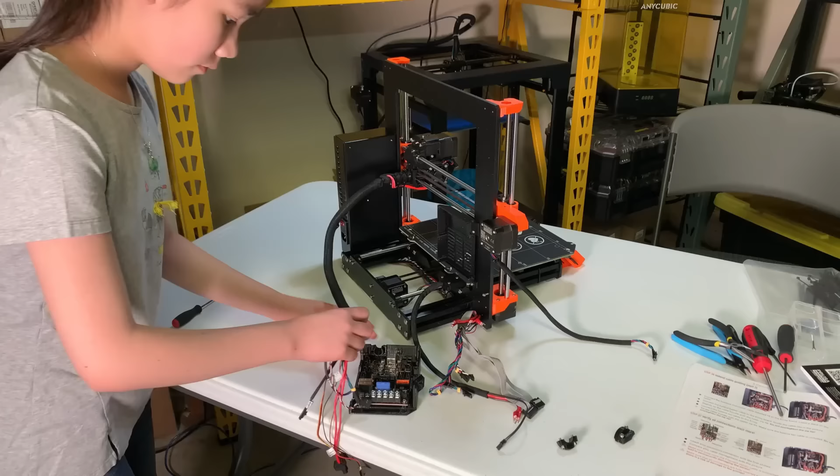Today, I'm going to review the Sovol SV01 Pro, which is an upgraded version of the SV01. It's one of the most affordable mid-range 3D printers and only costs around $300.

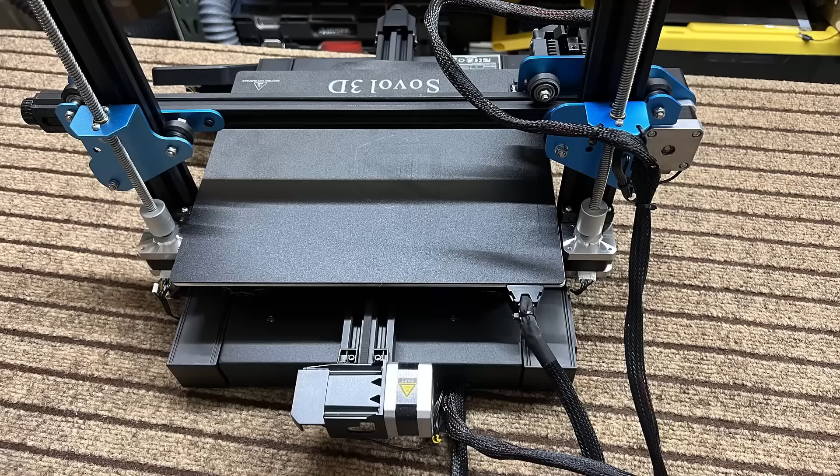It comes with almost everything you would expect from a mid-range printer, including a dual Z-axis, a direct drive extruder, auto bed leveling, a filament sensor, X and Y axis belt tensioners, a touchscreen, and a 32-bit board with silent stepper drivers on the X, Y, Z axes, and the extruder.

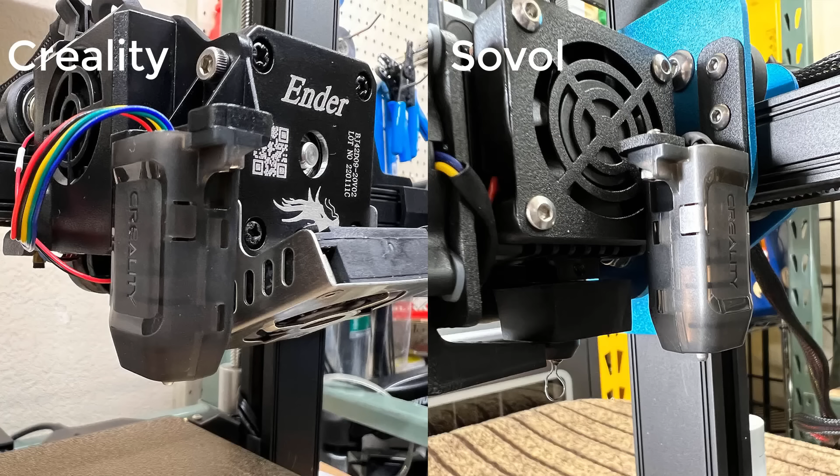One thing I noticed is that Sovol is sharing the same supply chain as Creality, so they have the exact same motherboard, filament holder, filament sensor, CR touch sensor, belt tensioners, and many other standard components.

This is basically a larger Ender 3S1 with a 280 by 240 by 300 print volume, which is around 50% larger than the Ender 3S1's 220 by 220 by 270. It has a different extruder, and it is $100 cheaper than the Ender 3S1.

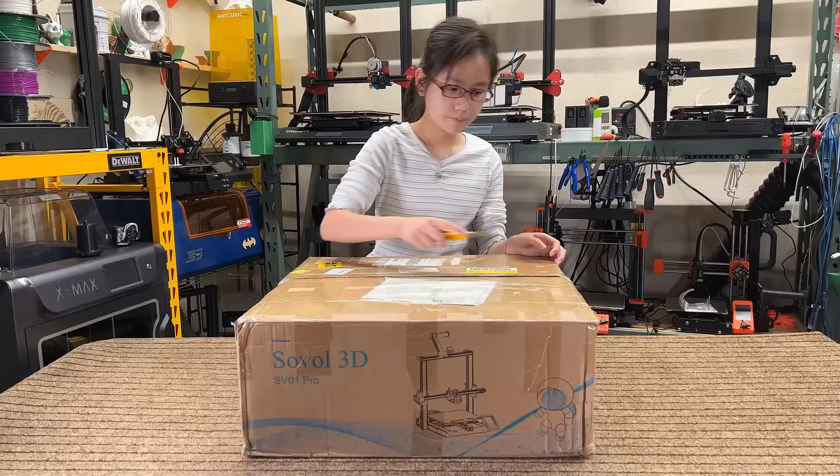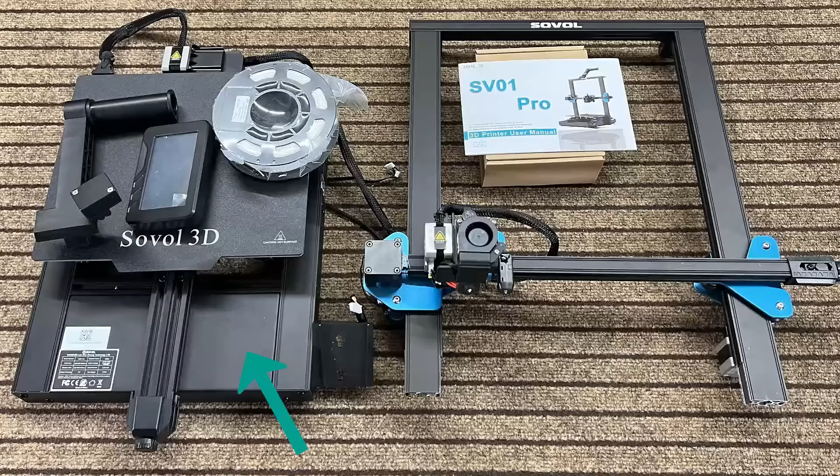We have the base, the gantry, a 4.3-inch touchscreen, the filament holder with the sensor, some sample filament, the user manual, and some tools. The assembly will be simple, and it should take less than 10 minutes.

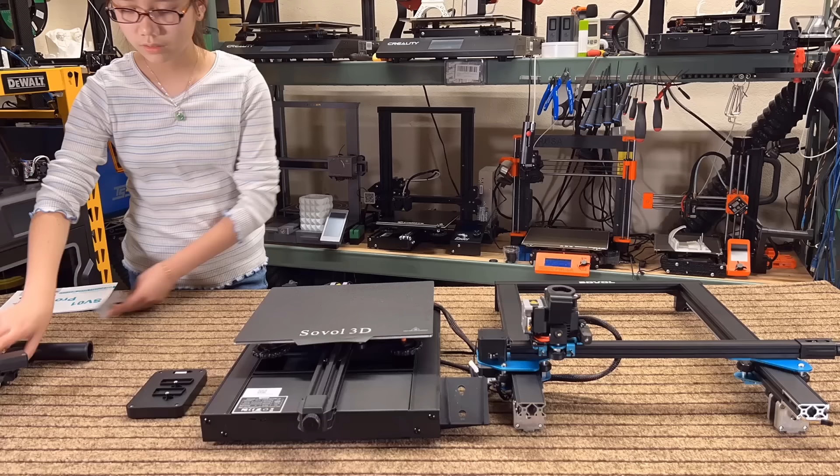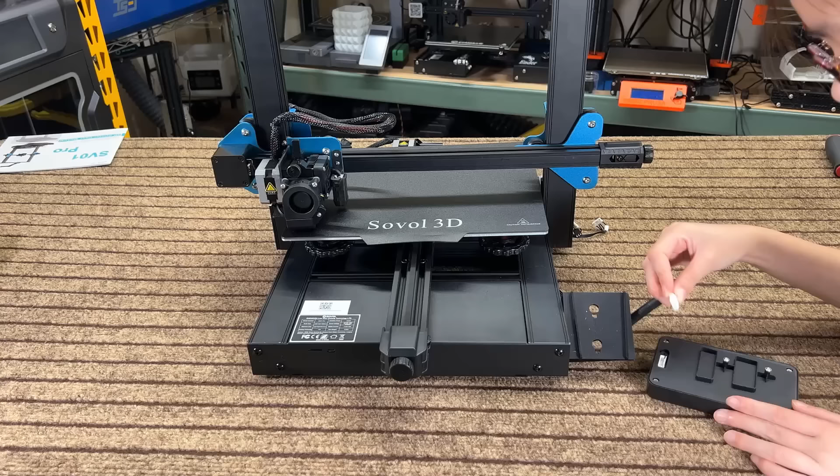First, put the gantry on the base and insert 2 long screws from the side, and I will tighten them later. Do the same to the other side and tighten the screws, then go back to the right side and tighten those screws. Connect the screen cable and snap it on the mount of the base.

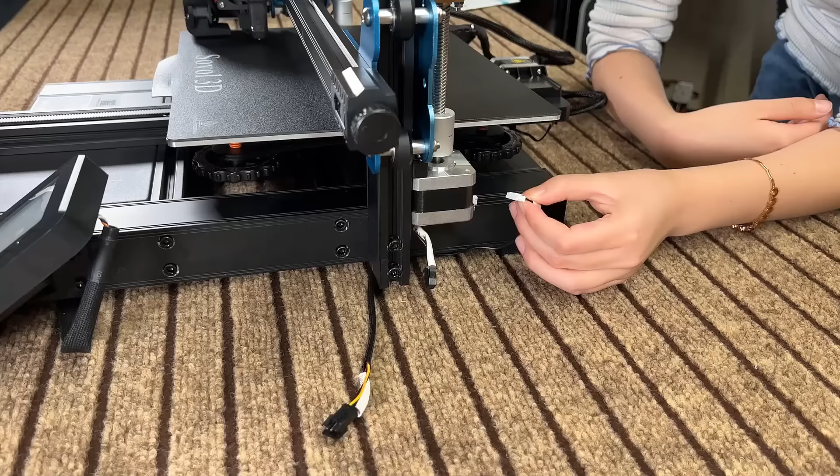The filament holder also has no screws and T-nuts, so just snap it at the top. Now, we can connect some cables, starting with the filament sensor, then the Z-stepper motor behind the screen, and the extension of the filament sensor.

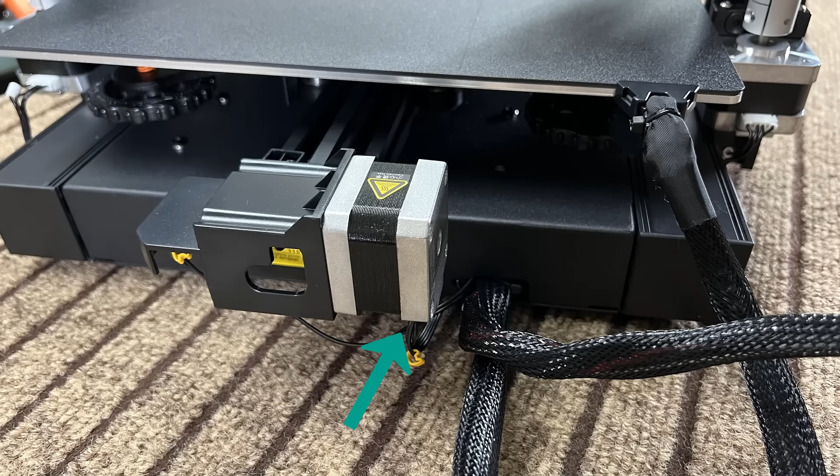On the left, we only have one Z-stepper motor cable. The rest of the cables are connected before this printer was shipped, including the X stepper, X limit switch, Y motor, Y limit switch, and the heated bed.

The last thing we need to do is check the voltage, and as I am in the US, I will flip it to 115. Okay, the assembly is done. We can connect the power and turn it on.

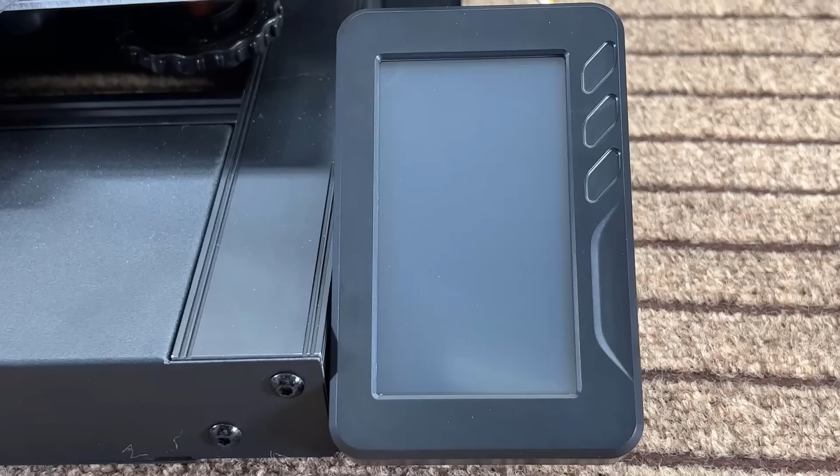The screen UI has been redesigned, and it's now simple and the menu locations are reasonable. As you can see, the Z offset, bed corner leveling, and auto bed leveling are grouped together under the leveling menu. Select the leveling menu and it will start with auto home.

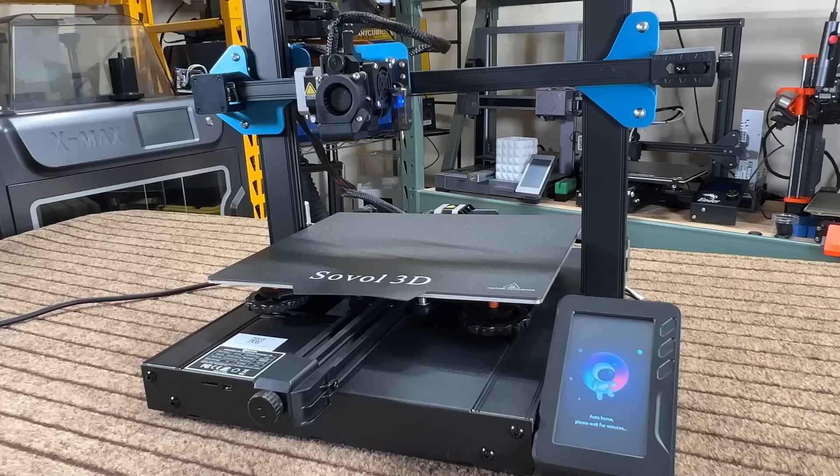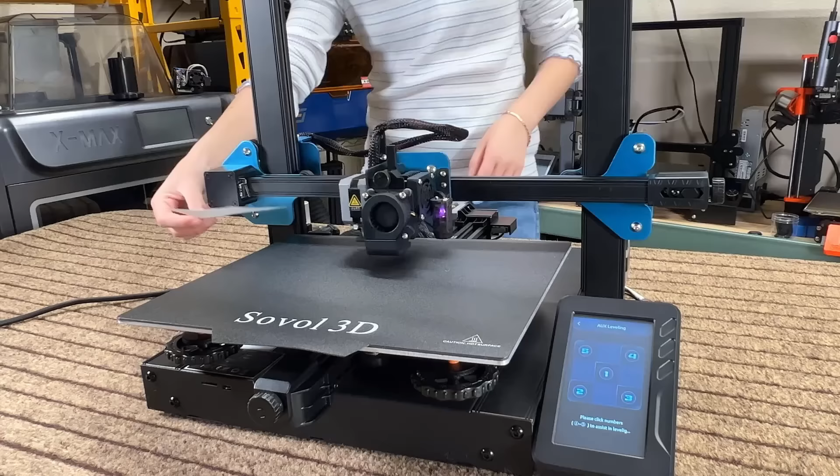Start with auxiliary leveling and level all 4 corners of the bed. Use the simple paper test to move the nozzle close to the bed and let it slightly scratch the paper. Do the same to all 4 corners, and you may need to do another 1 or 2 rounds to make sure it is perfect.

Go back and use the arrows on the screen to adjust the Z offset, and negative 1.8 mm seems perfect, so I will just save this value and start auto bed leveling.

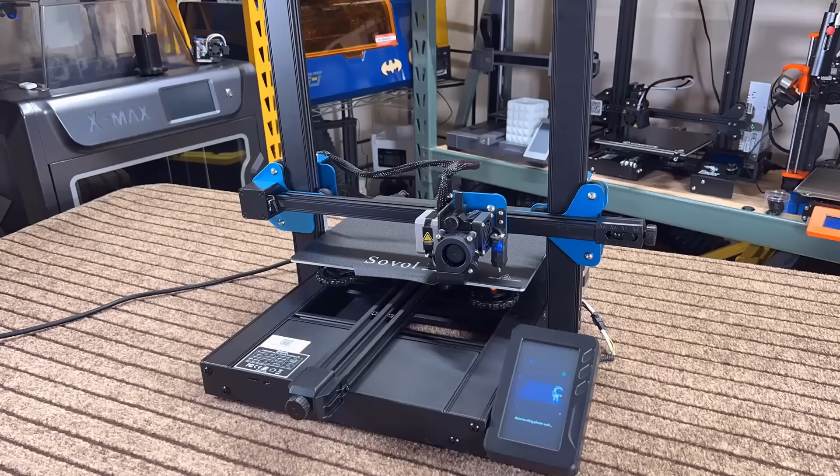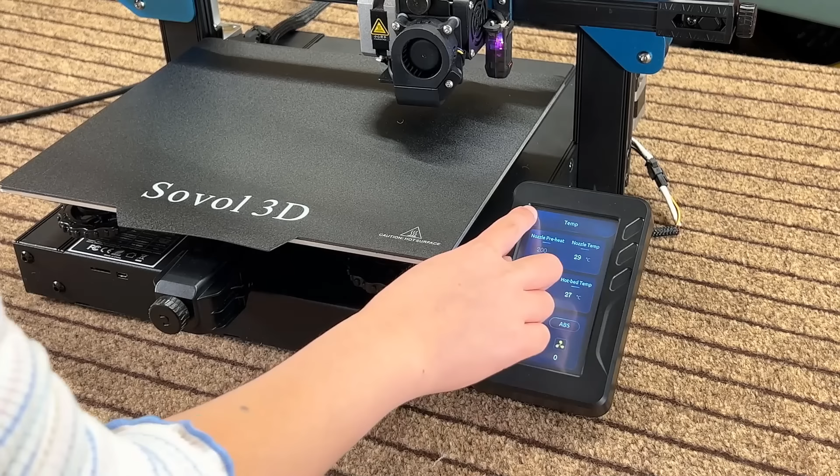After all 16 points are measured, we can go back to the main menu, preheat the machine, and feed in some filament. Once the temperature reaches 200 degrees Celsius, run the filament through the filament runout sensor, pull the lever,

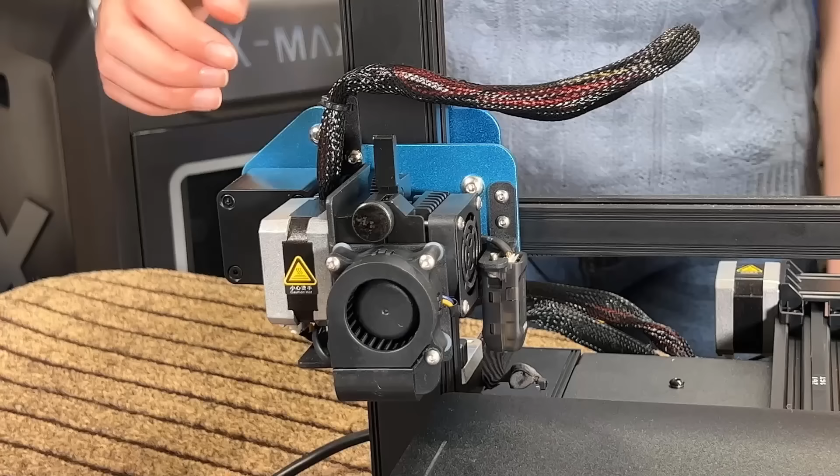and insert the filament until you can see it coming out from the nozzle. Remember to adjust the tension of the extruder, otherwise it can't grip the filament tightly and give you consistent extrusion.

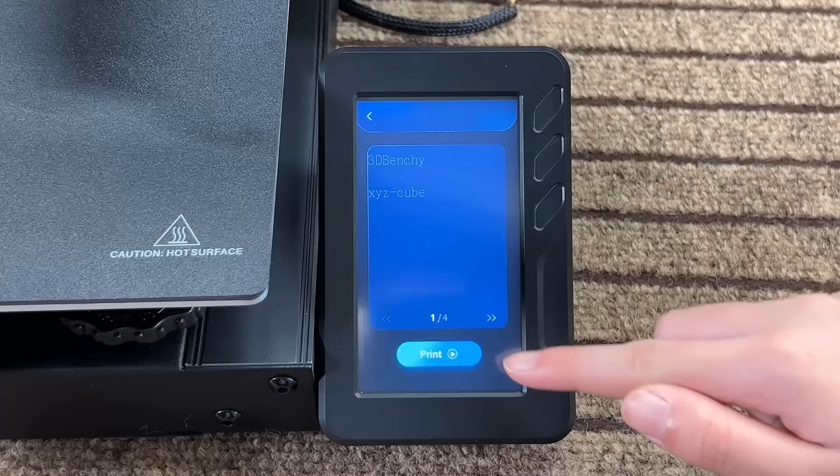Now, we can insert the SD card and start our first print. Let's try this XYZ calibration cube.

It's a little weird to see the X side of the cube on the Y axis, but just let it finish.

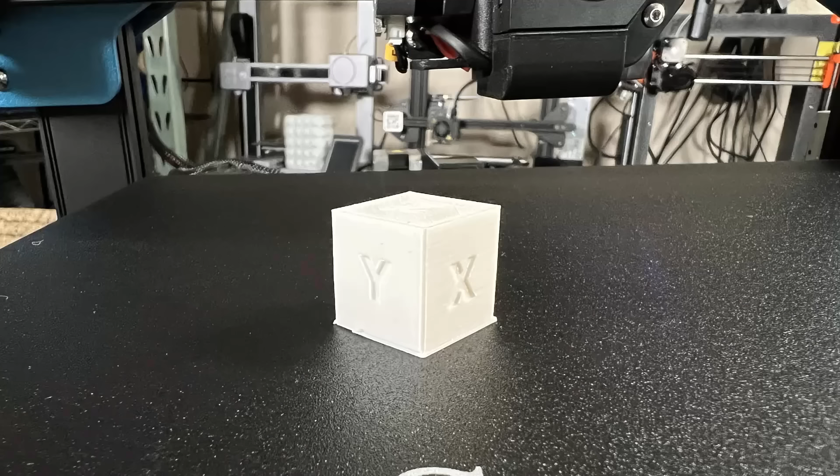The cube does not look exactly like the test cubes that I would normally print, but as you can see, the dimensions are all accurate.

I will now go to Cura and set up this printer. Select Add Printer, Non-Network Printer, and Sovol.

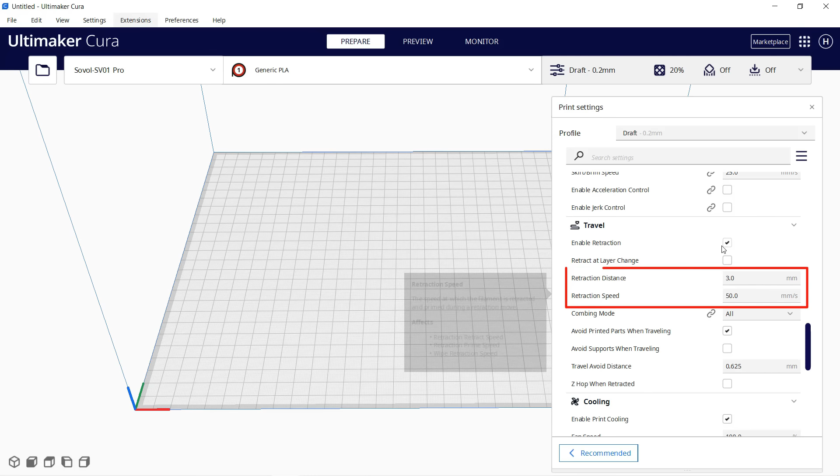The standard profile looks good, and the 3mm retraction seems to be a little bit too much, but I will just leave it and come back to adjust if necessary.

Let's start with the normal calibration cube. It will take 28 minutes, which is in line with most other FDM printers.

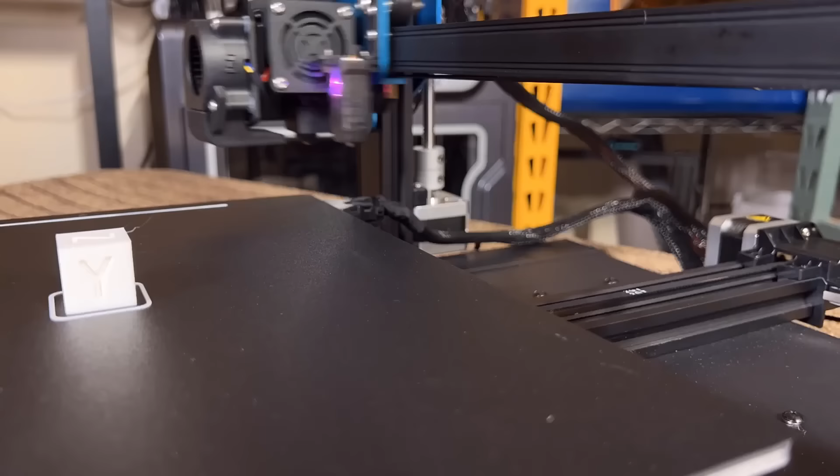The cube looks fine, and the dimensions are also accurate.

Next, I will print a 3D benchy.

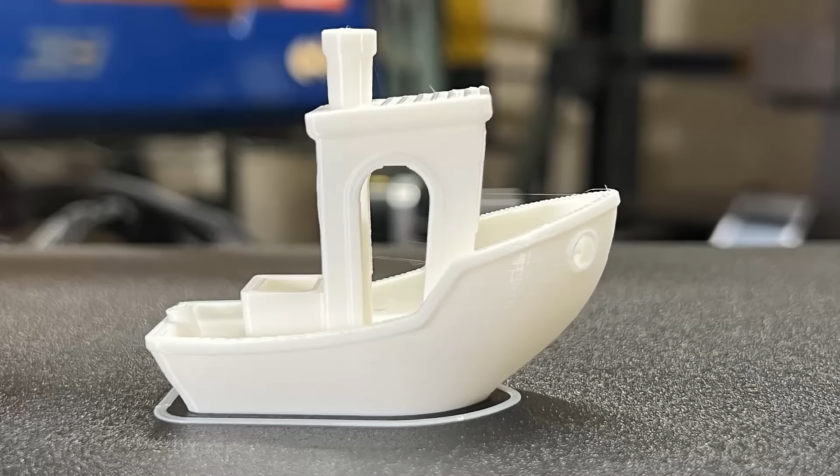There's just a tiny bit of stringing, but the layers, cooling, and overhanging all look good. It seems the 3mm retraction distance and 50 mm/s speed works fine on this extruder as well.

Then, I will print this cat model. The contact area of the feet is small, but this sticker sheet print surface should stick well.

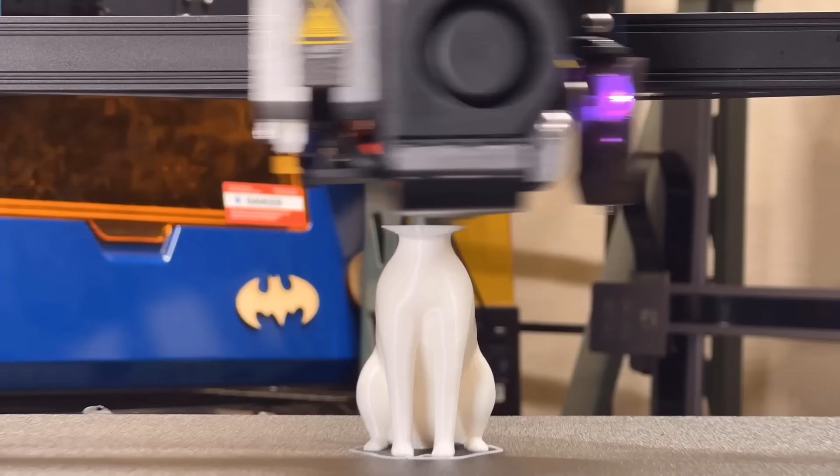This cat model looks beautiful.

Next, I will try printing the Statue of Liberty. This model is too tough to print at the original size, so I will enlarge it and remove the base by lowering it under the build plate. It is still going to take almost 11 hours to print.

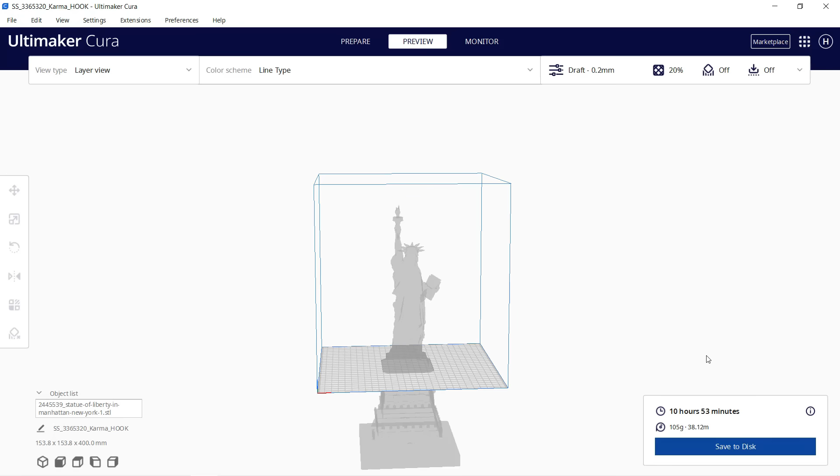The tablet should add some support, but I really don't like removing support, so I will just print without it and see how it looks.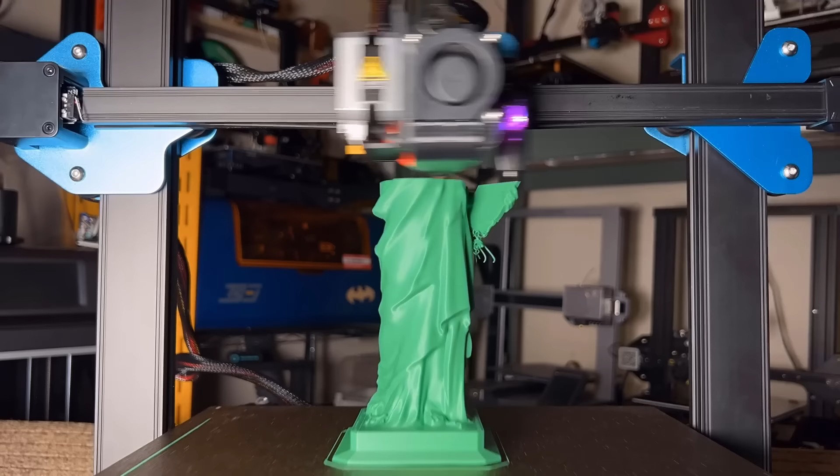I think the result still looks pretty good, and I could simply use a flush cutter to trim the bottom of the tablet, and it ends up looking really nice.

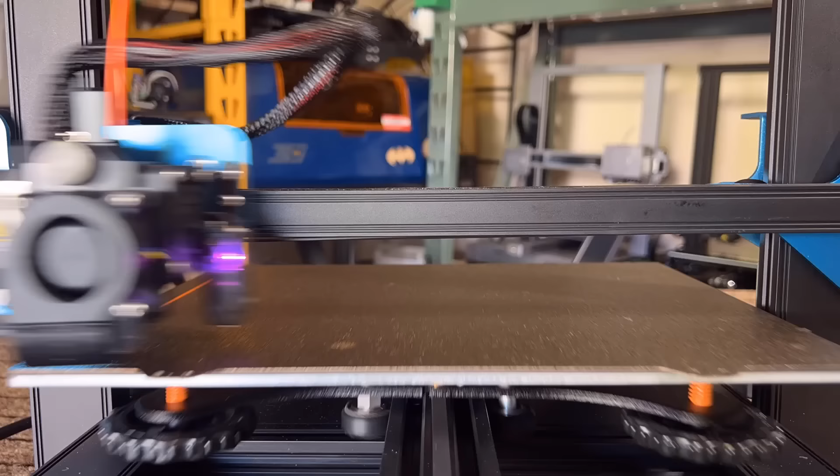Besides PLA, I will also print some PETG. Let's print this carabiner with Prusa Orange PETG. As expected, PETG sticks a little more than PLA, but the carabiner is still okay and is fully functional.

Next, I will try printing with ABS. I will print a shelf bracket that I have printed with many printers, and this is mainly to test out the stock print surface. The ABS bracket looks okay.

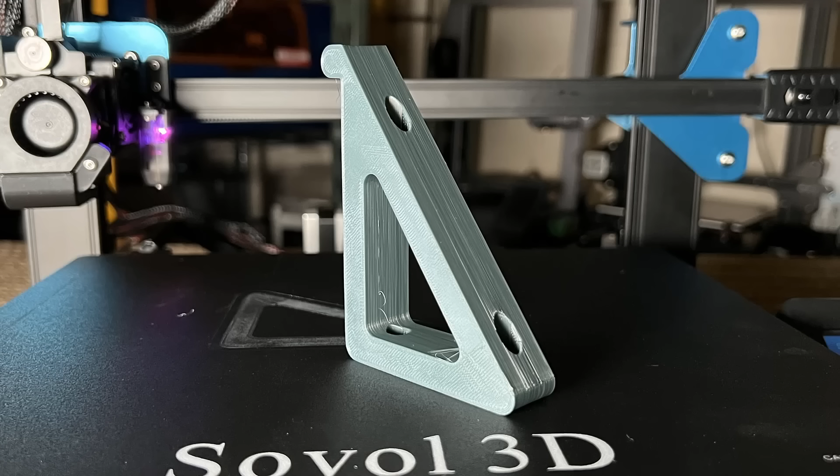The magnetic print surface works the same as the one on the Ender 3 Pro. It works better than a glass bed, but is not as good as a PEI textured sheet. There's a little bit of warping here, but it is not bad overall.

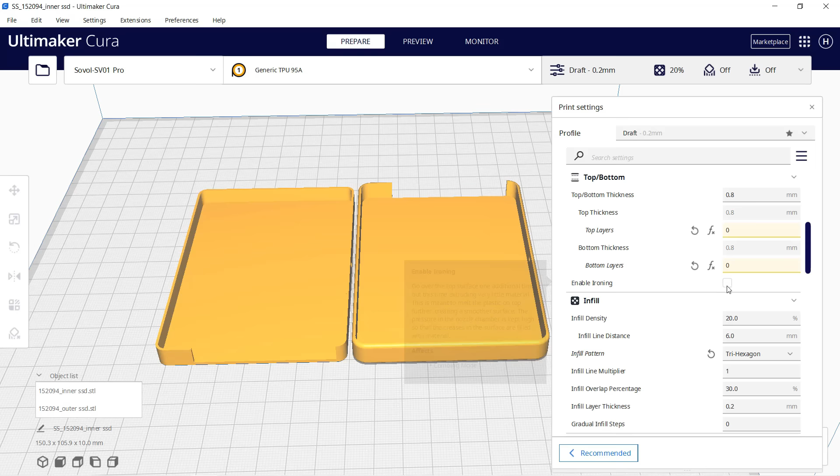Next, I will print a TPU SSD case. I will use flexible filament to print this SSD case, so it can also work as a protector for the corners. Just select 0 layer bottom and 0 layer top, and use the infill to make the pattern you want on the surface.

The TPU SSD case looks really nice and it fits perfectly.

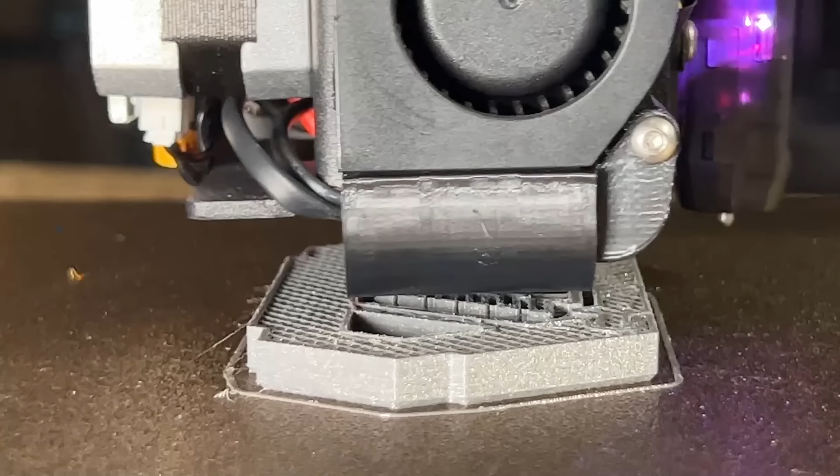Finally, I will print some nylon filament. As this hot end can reach up to 260 degrees Celsius, I'm using the Overture nylon filament, which I've gotten good results with at 260 degrees Celsius before. So I will print another carabiner on this SV01 Pro with nylon.

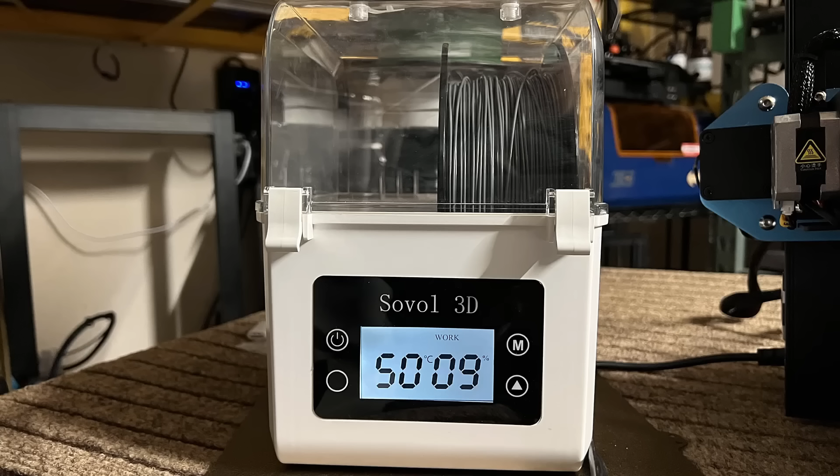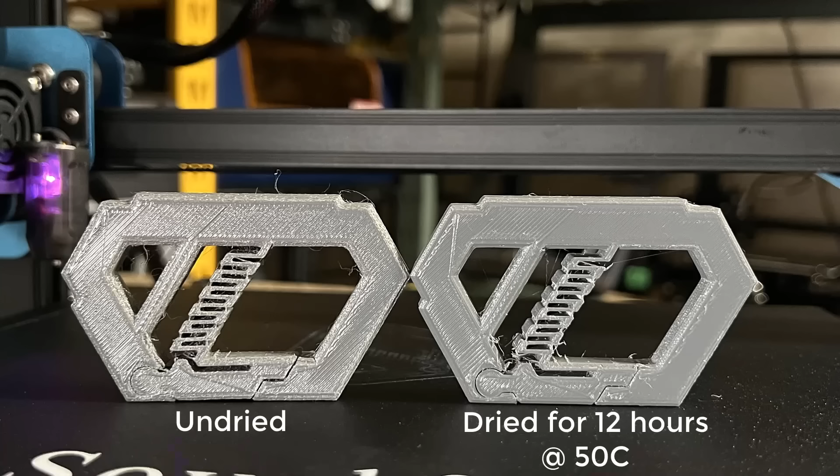As this nylon filament has been open for a few months and may have absorbed some moisture, I will use a filament dryer to dry it. As you can see, after the filament is dried, the layers stick much better and there's less stringing than before.

After spending a week with this printer, let's talk about the pros and cons, starting with the pros. 1. It's super easy to assemble and many cables are connected in the factory, so putting everything together requires just 10 minutes or even less. 2. The print quality is good and it prints great right out of the box.

It is on par with the Ender 3 S1 when printing PLA, PETG, and ABS, but it cannot print carbon fiber filament like PACF or PCCF, as the maximum printing temperature is limited to 260 degrees Celsius by the PTFE tube inside the heat break.

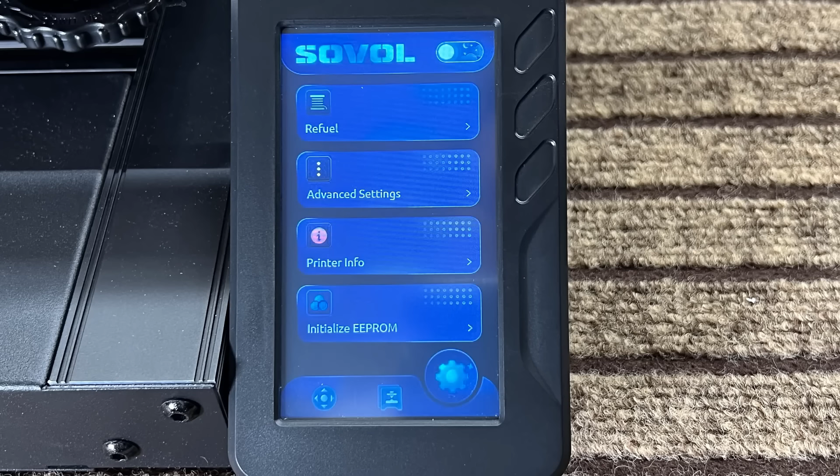3. The screen UI is nice, the menu structure is one of the best, and the location of each item is reasonable and easy to use. I don't need to guess anything with this UI.

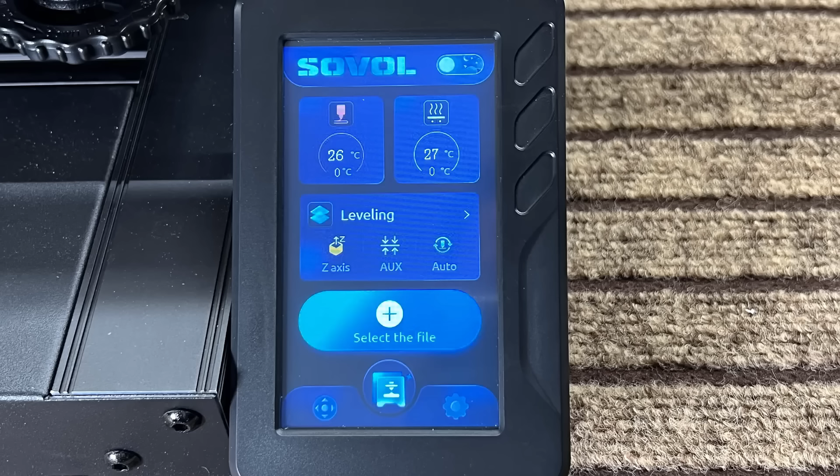4. The SV01 Pro is an upgraded version of the Sovol SV01. It costs about $100 more than the SV01, but you get a 32-bit board, 4 silent stepper drivers, a 4.3-inch color touchscreen, a CR Touch auto bed leveling sensor, a set of belt tensioners on the X and Y axis, cleaner cable management, and some other minor cosmetic upgrades, so I think it is worth the price.

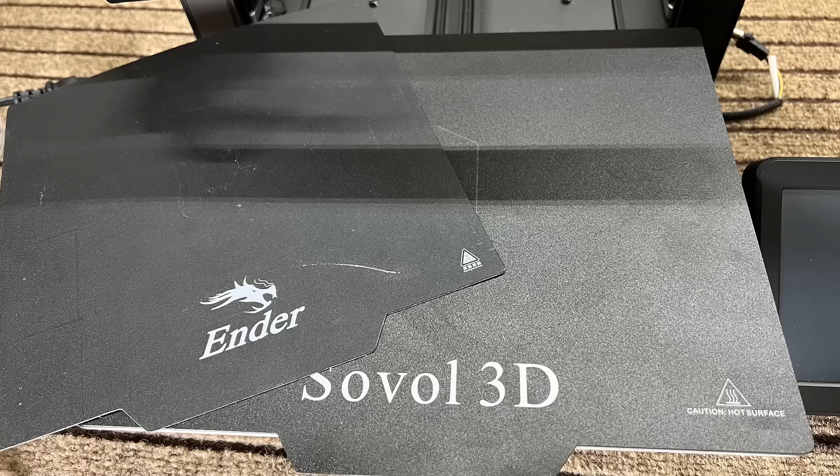Now for the cons. 1. The print surface is a magnetic sticker sheet, which is the exact same as the one on the Ender 3 Pro. This print surface is a bit outdated, and it would be nice to see a PEI textured sheet instead.

2. The extruder itself is working fine, but it is a single gear extruder, so it would be better to come with a dual gear.

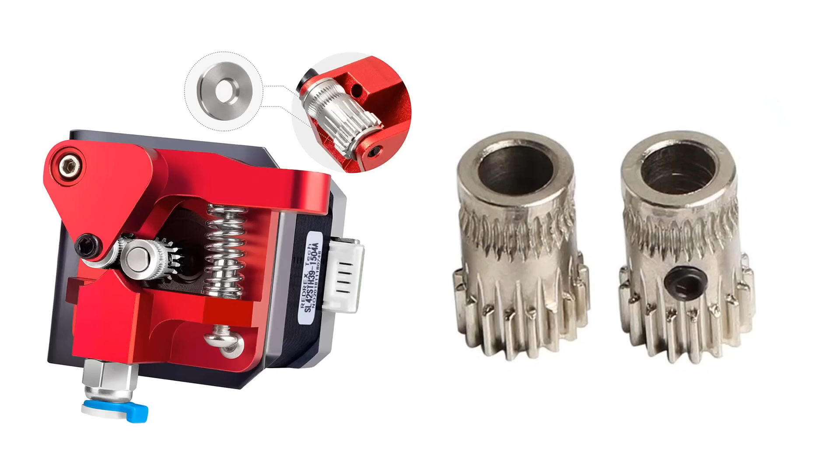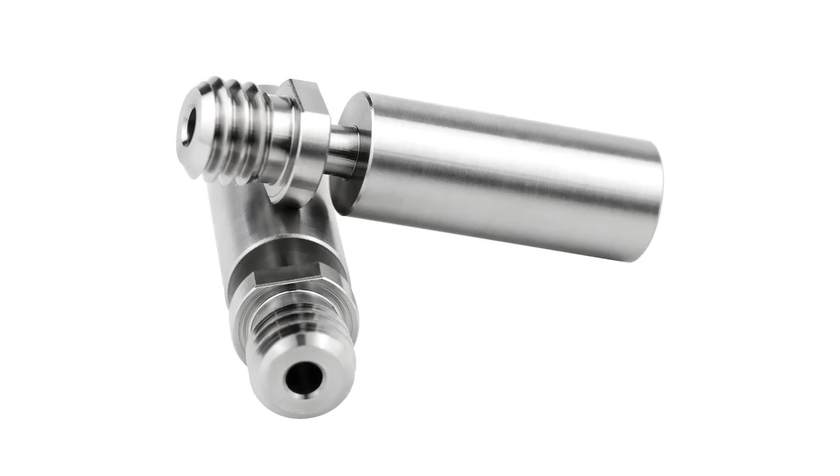3. The maximum temperature is only 260 degrees Celsius. If Sovol uses a titanium heat break instead of the one with the PTFE tube inside, it would be able to print at 300 degrees Celsius and bring this printer to the next level. I would rather pay an extra $10 for the titanium heat break.

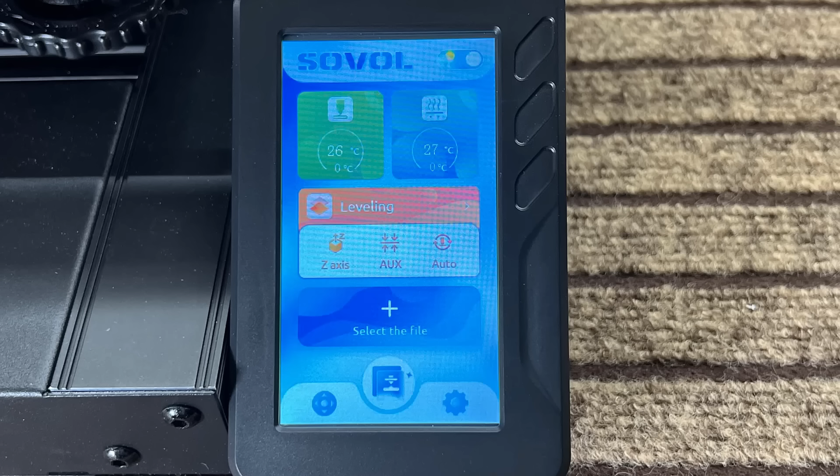4. The screen UI is well structured and the dark theme looks okay, but I'm not a huge fan of the light theme. Also, the resolution of the images is low, so if the image size is being limited by the memory of the screen, it may be better to just keep one set of the dark theme with higher resolution images. In conclusion, I think this printer is pretty good.

The build is solid, it's easy to assemble, the print quality is really nice right out of the box, and it comes with all mid-range printer features at a slightly lower price.

It would be perfect if it also came with a PEI spring steel sheet, a titanium heat break, and a dual gear extruder. I would be happy to pay another $40 for these upgrades.